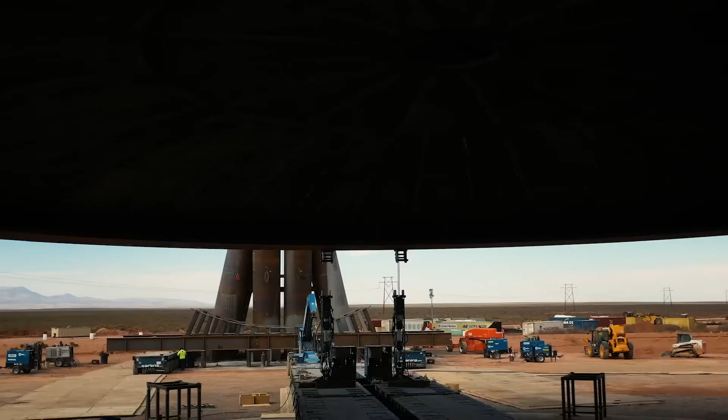In the middle of a global pandemic, a ragtag group of welders, heavy machine operators, and builders were brought together. They were given plans for a mysterious structure. With little information on what exactly they were building, their only clue was scrawled across the top of their plans: SpinLaunch, a space catapult. In this exclusive, behind-the-scenes documentary, I talked to the people behind this new innovative company.

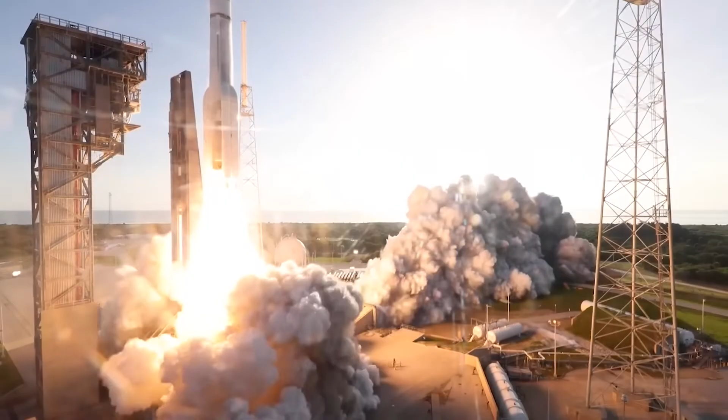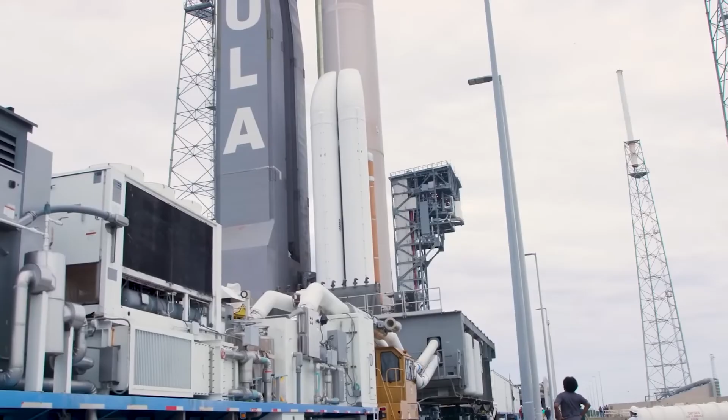SpinLaunch is attempting to subvert a problem that plagues the space industry: the rocket equation. The rocket equation has been the tyrant engineers have feuded with from the dawn of the space age, a simple equation that describes how much fuel a rocket needs to carry a payload to its destination. The tyranny of this equation is that the fuel needed to deliver that payload is a payload itself, a compounding problem that makes rockets more fuel than rocket.

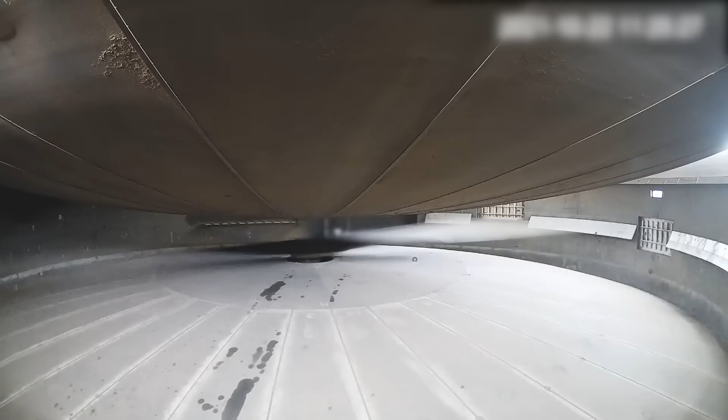Typical rockets are more than 90% fuel. SpinLaunch is trying to change that paradigm by imparting as much velocity as possible to the payload on the ground, eliminating as much fuel as possible from the rocket's weight, while greatly reducing the size and complexity of the non-reusable components. Their plan: to spin a small rocket in a centrifugal mass accelerator under a vacuum up to an astonishing speed before releasing it, punching through the thickest layers of our atmosphere at hypersonic speeds, gaining 72 kilometers of altitude off nothing but pure kinetic energy, before splitting its fairings and unveiling a substantially miniaturized two-stage rocket to continue its journey into orbit. You may question the numbers here, but this isn't the first time this has been done.

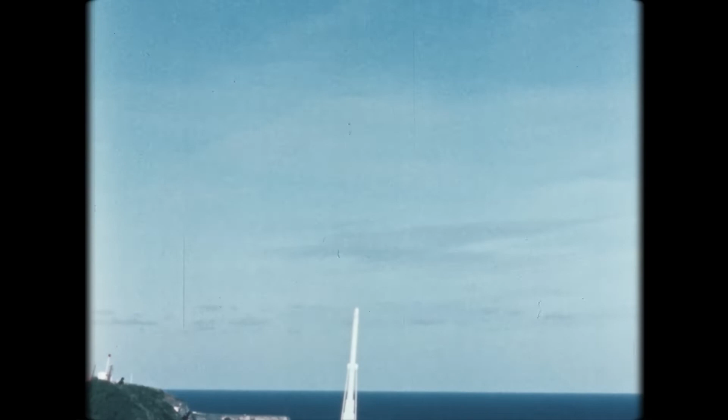Project HARP, standing for High Altitude Research Project, managed to get a projectile to 180 kilometers of altitude with a high-powered gun. They achieved a muzzle velocity nearly identical to SpinLaunch's planned launch velocity. However, scaling a kinetic energy launch system up to launch a 10-ton projectile needs SpinLaunch's technology.

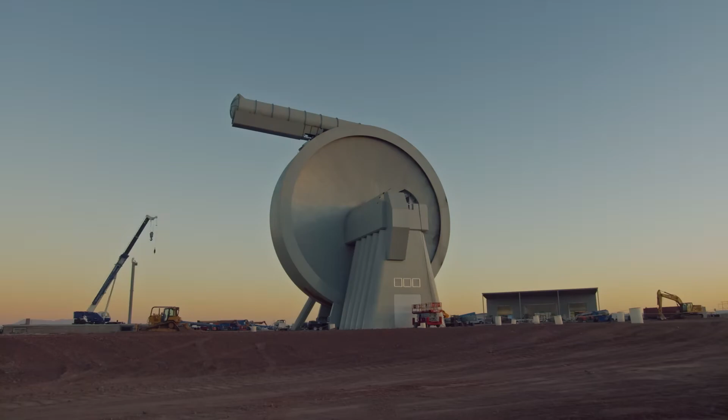Of course, all of this is easier said than done. The challenge facing SpinLaunch's engineers is immense. This endeavor demands several new key enabling technologies.

So in terms of key enabling technologies, carbon fiber certainly takes center stage. That's David Wrenn, SpinLaunch's VP of Technology. I spoke with him on the SpinLaunch factory floor about the carbon fiber reinforced plastic that they are using for their tether. In terms of its strength to weight ratio, it's essentially unmatched by any other material on Earth. And the amazing thing is that it's actually available in industrial quantities now, and the engineering tools and simulation methods exist to really quickly iterate and understand what a composite structure will do. And then we have structures and test rigs like this to validate in the real world that the components actually fail at the expected loads.

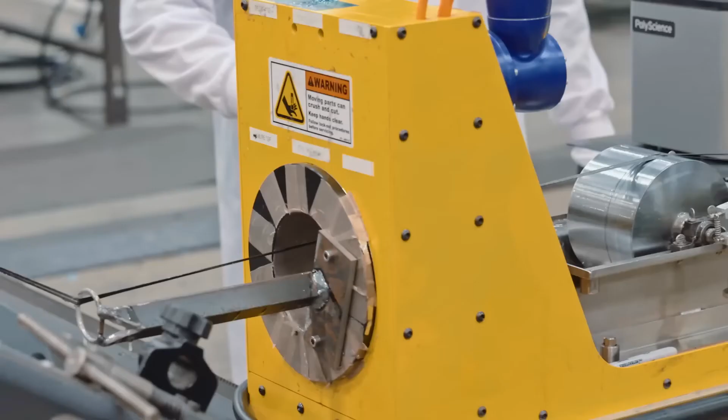So just to give you a sense of the strength of carbon fiber, this is a pultrusion. So this is made by taking carbon fiber tow, essentially spools of carbon fiber, and pulling it through a heated die with a resin bath. Basically, the resin gets impregnated into the carbon fiber tow as it gets pulled through the heated die. And you get these really nice, highly unidirectional structures that can be used for SpinLaunch, right?

And so as small as this cross section is, right, I think this is about 1/8 of an inch thick and only a few inches wide. This can do just under 250,000 pounds of total load capacity, which is really, really impressive. I'm trying to convert it to metric in my head. It's like, oh yeah, no, that's a lot. Yeah, I think it's like 1,000,000 newtons or something like that.

Yeah. So, and then if you look at, this is where it gets interesting is can you build really thick cross sections of carbon fiber? You can see there's really great... Is this pultruded as well? So this is not pultruded. This is laid up and then it's cured in an autoclave. Okay. So this is essentially a subsection of the laminate that you would see at the root of the tether on the suborbital system. So this is not unidirectional or pultruded.

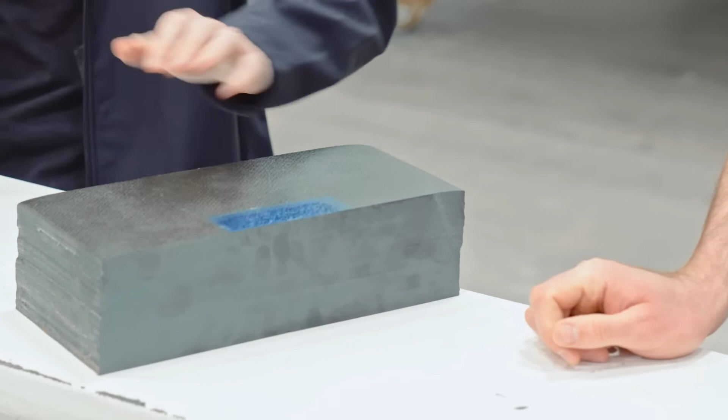But if you were to take this same cross section here, and basically make this a pultruded fiber, if you just stack up multiple pultruded sections, you would get about 9 million pounds of total load capacity through this cross section. So it's impressively strong for what it is. I mean, it's heavier than you'd expect. Yeah, holding a carbon fiber brick. I don't think I've ever seen an application where that much carbon fiber has been laid up. It's rare to see carbon fiber this thick. Yeah, it really is rare.

The final fully scaled tether for SpinLaunch's orbital system is likely going to be the single strongest tensile structure on Earth. Let's do the math on that. SpinLaunch aims to yeet its aeroshell containing the miniaturized rocket system at about Mach 6, that's roughly 2 kilometers per second. With a radius of 45 meters, the tether will need to spin 450 times per minute to attain that velocity.

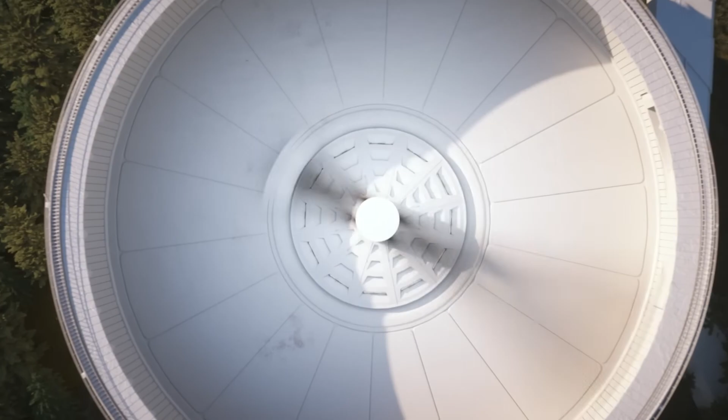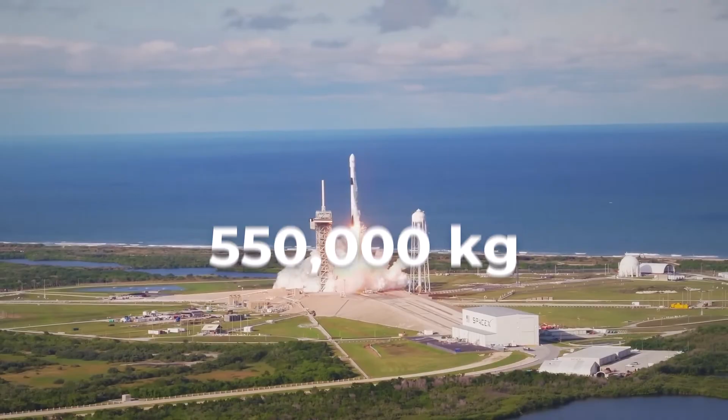At that rate, the G-loading on the tether will be 10,000 Gs, meaning this aeroshell is going to exert a force 10,000 times greater than its weight due to gravity. The aeroshell with the payload and rocket is going to weigh approximately 10 metric tons. So that means the tether at the tip needs to support 100,000 metric tons, or 100 million kilograms. To put that in context, a fully loaded Falcon 9 weighs about 0.55 million kilograms. So this tether needs to support the equivalent weight of 182 Falcon 9s.

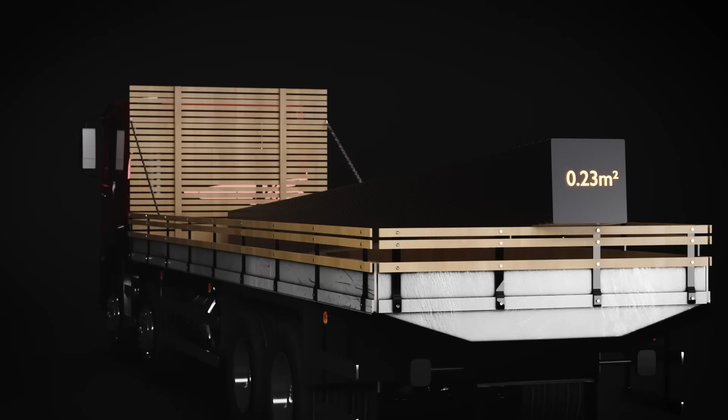This is going to require a hefty piece of carbon composite with a cross-sectional area of at least 0.23 meters squared. That explains the brick of carbon fiber we saw. That brick could support 4.1 million kilograms. So the full-scale tether will need to be 24.4 times this size at its tip.

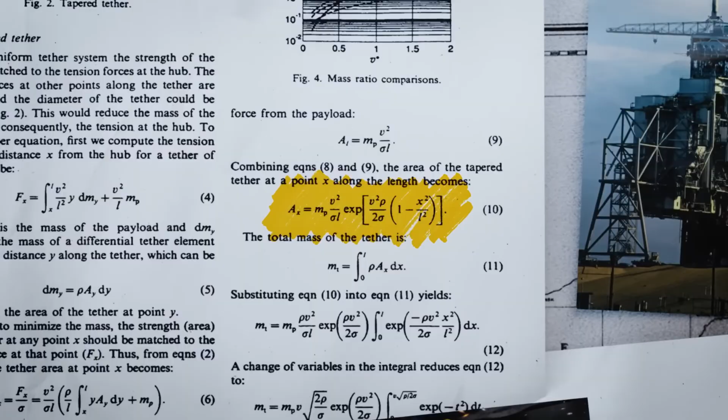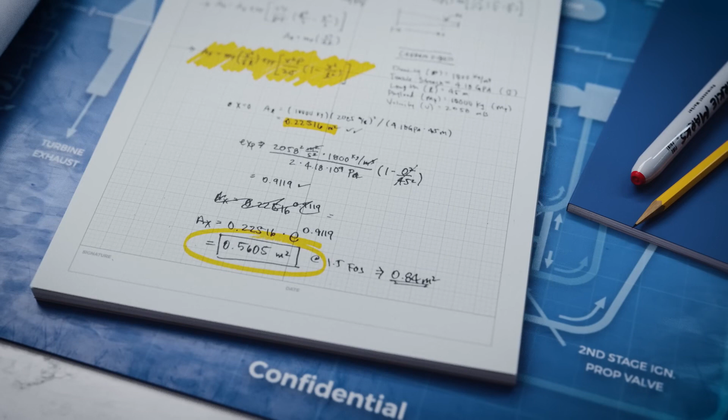But that's just the tip. This equation tells us why carbon fiber is so vital to this endeavor, because each section of the tether has to support the section above it. Its strength-to-weight ratio needs to be exceptional. If we calculate the tether area near the hub for the same carbon composite, the tether only needs to increase in area by 2.5 times, at about 0.56 meters squared. We would, of course, need to add a safety factor of at least 1.5, increasing these dimensions by 50%.

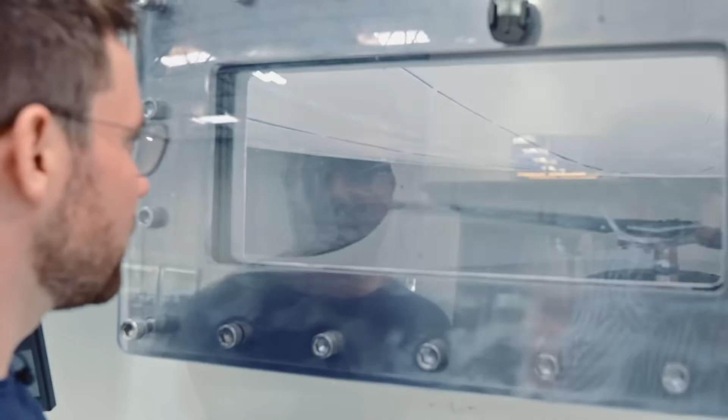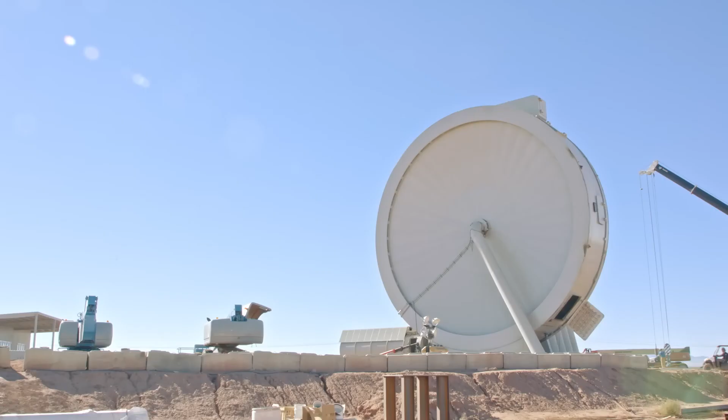That design is perfectly feasible and is reflected in SpinLaunch's renders. We even have the manufacturing skills necessary to build even larger composite structures thanks to the wind industry. So this is all well and good, but spinning a carbon fiber composite up to Mach 6 isn't possible in air. The aerodynamic heating would destroy it. So to solve this issue, SpinLaunch created a massive vacuum chamber around its tether.

There's a bunch of things at the beginning of SpinLaunch that were non-starters for a lot of people, like even just building the large diameter vacuum chamber. People were telling us the one behind me here would cost tens of millions of dollars to build, and we ended up doing it. We had this really scrappy, lean mindset, and we ended up doing it for less than a couple million dollars with about 10 people, which is unheard of. There are some large industrial vacuum chambers out there, but quite a few of the really large chambers in the world are for aerospace applications, achieving extremely high levels of not only vacuum but cleanliness. So the cost is proportional to that, and it's kind of exponential.

They're achieving vacuums on the order of 10 to the negative 8 torr. Typically we're operating at about 1 million times worse than that. SpinLaunch is breaking new ground with this kind of vacuum chamber.

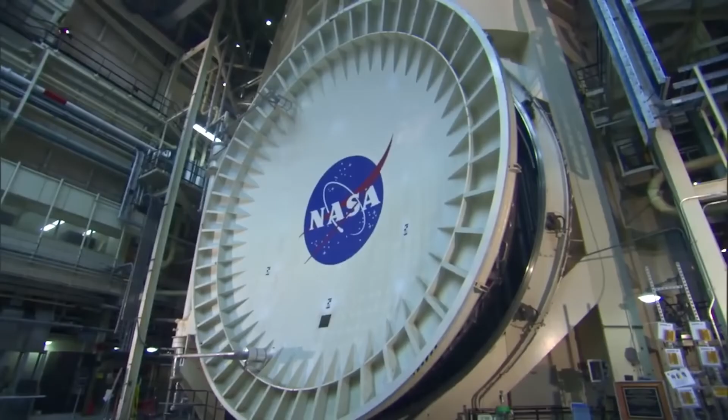Typical large volume vacuum chambers, like the world's largest one at the Space Power Facility in Sandusky, Ohio, are designed to simulate the vacuum of space. Those require an extremely low pressure vacuum with tight tolerances and control of contamination. They even need specialized tools like lamps to simulate the radiation and heat from the sun, and cryogenic cooling to simulate the cold of space. The people who built these facilities are the industrial experts SpinLaunch had to draw from, and most thought they would never be able to build a vacuum chamber this large on their budget.

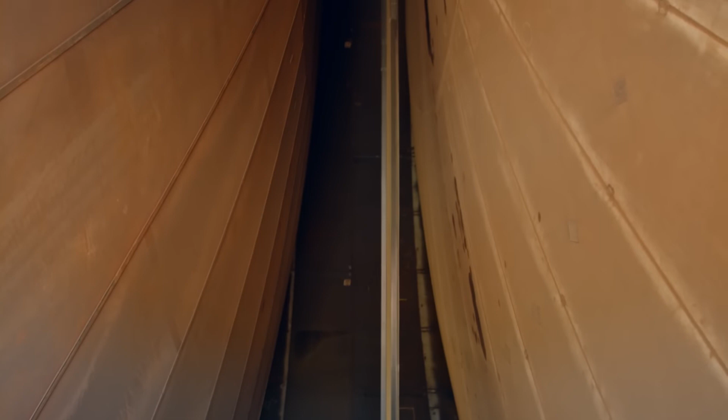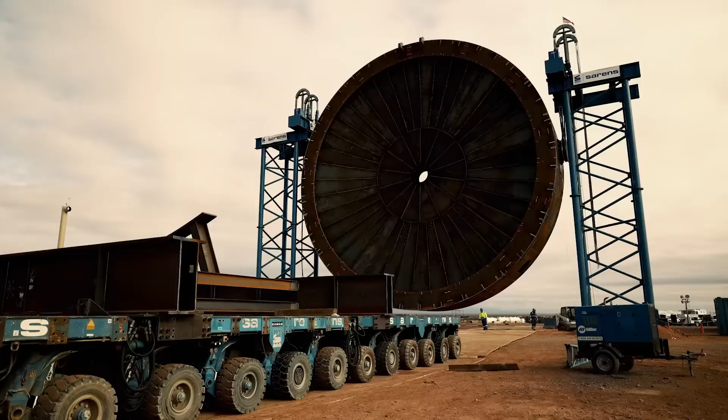But SpinLaunch does have some things on their side. They didn't need that extreme of a vacuum, as their goal is not to simulate the vacuum of space. Their goal is to minimize drag and the power required to overcome it, minimize the aerodynamic heating that would destroy the tether, and eliminate pesky aerodynamic effects like flutter. That means SpinLaunch could use cheaper materials like mild steel, where ultra-high vacuum chambers need more expensive specialized processed materials to avoid outgassing, where gases within the metal, in the form of oxides or simply dissolved within the metal, are released into the vacuum.

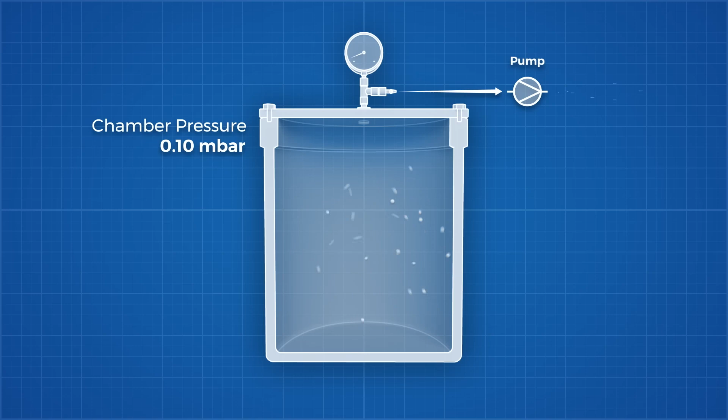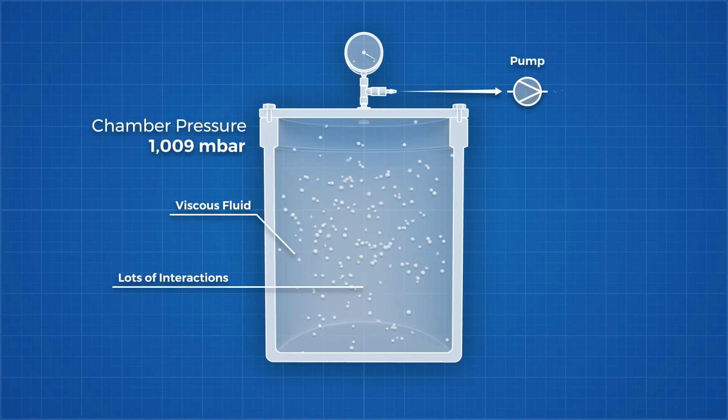It also makes the process of drawing a vacuum much easier. Drawing a vacuum isn't as simple as just turning on a pump and leaving it on long enough. The more air you draw out, the harder it becomes, as you are working against not only a continually growing pressure gradient, but statistical probability. The first stage of drawing a vacuum is to remove the bulk gas. At this stage, the gas is a viscous fluid, and the molecules within the chamber interact with each other often.

Here, we can use traditional fluid flow pumps, like a positive displacement pump, that mechanically move molecules out of the chamber, and higher pressure air at the back of the chamber forces more air to fill the space created, allowing more air to be pumped out.

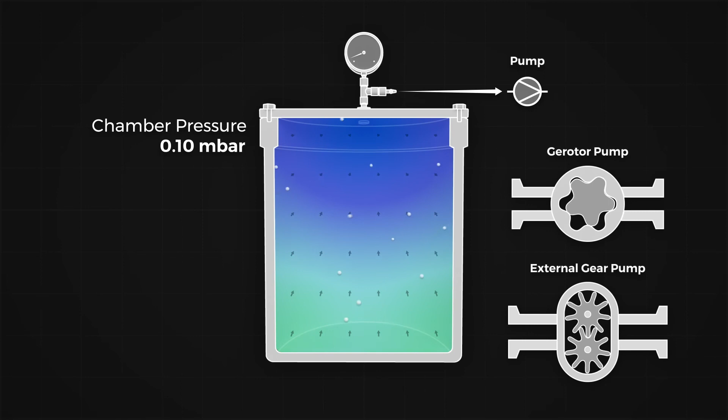But as gas is removed from the chamber, the distance between the molecules increases. This is called the mean free path, the distance a molecule can travel without colliding with another molecule. Now, pressure is really just molecules colliding, and as collisions become more infrequent, the pressure gradients needed to achieve equilibrium begin to vanish, meaning it takes longer and longer for equilibrium to be established, and the rate the pump can remove molecules lowers, as there are simply fewer and fewer molecules near the pump to remove.

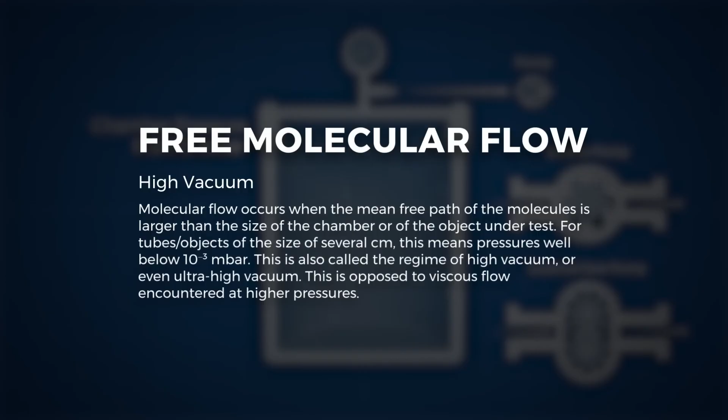At some point, viscous flow stops entirely, and we enter a flow regime called molecular flow, where the distance between collisions is actually larger than the internal dimensions of the vacuum chamber, meaning the molecules are statistically more likely to just bounce around inside the chamber with nothing forcing them towards the exit.

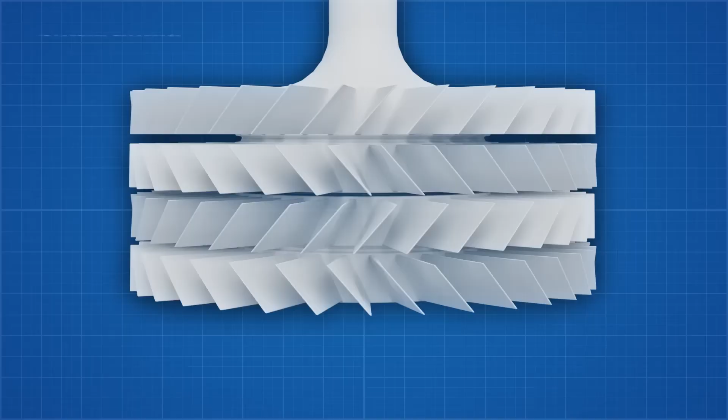At this stage, it is impossible to actively pump the molecules out. The molecular pumps needed for this flow regime instead act like some kind of Venus flytrap, waiting for a molecule to enter it, and then its job is to prevent the molecule from returning to the original chamber.

Turbomolecular pumps are basically multiple levels of turbines that knock molecules in one direction and prevent them from traveling backwards. These pumps require insane rotation speeds, anywhere from 36,000 RPM to 72,000 RPM, and need incredibly tight tolerances too. They are trying to pump individual molecules after all. So it goes without saying, these kinds of pumps are expensive.

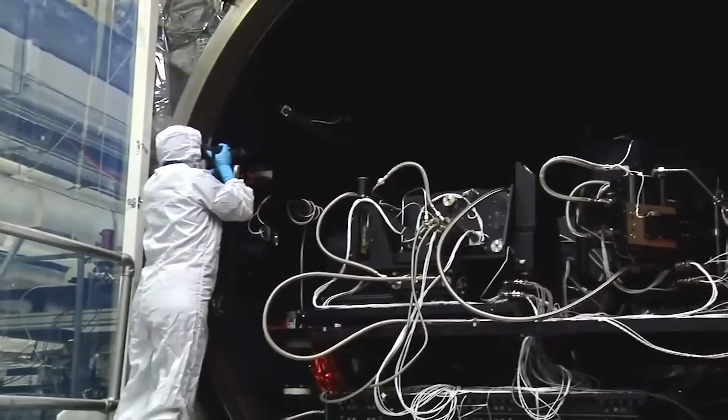All the while, outgassing and other leaks are actively working against a game of pure chance. Creating a high vacuum requires extreme precision in manufacturing and design.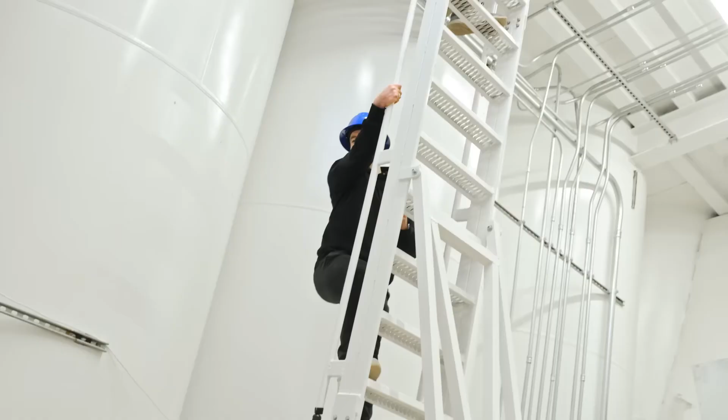SpinLaunch didn't need any of this. Mark Sipperly, the director of engineering at SpinLaunch, walked me through the vacuum pump station at the New Mexico site.

Here in the vacuum plant, the most familiar thing would be the tube that came out of the chamber and then runs underground is this manifold. So this is the very end of it. So off of this vacuum manifold, we then have a series of 3 different types of pumps.

Up on top, we first have roughing pumps, which pull the atmosphere from 1 atmosphere down to about 30 millibar. Those are dry screw pumps. They're essentially like overlapping lobes. It's one form of like a supercharger.

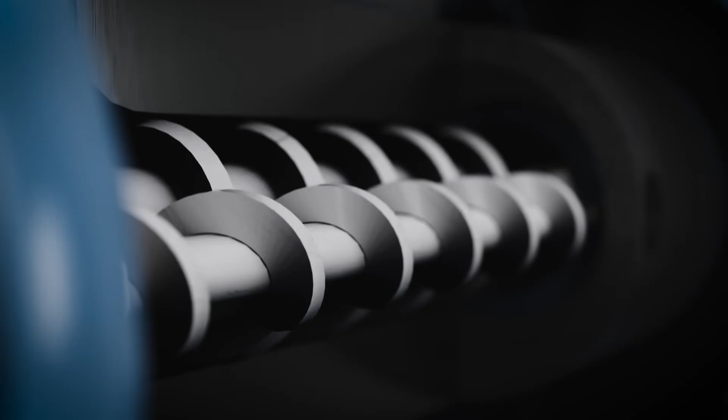Then the next stage is we have this roots pump, which is like another shape of a supercharger. It's the rotating twin screw pumps. All right, so that kicks on at about 30 millibar. It's mostly only effective at 30 millibar and below.

But you'll notice that each pump exhausts into a pump that's a slightly higher pressure. So this roots pump only works at 30 millibar and below, but it can't exhaust that all the way out to 1 atmosphere, so then it's backed by another pistons pump.

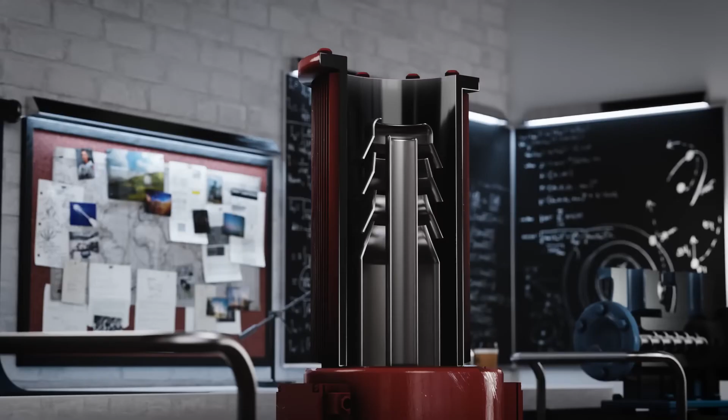And then once we get down below 1 millibar, then we're gonna turn on these vapor diffusion pumps, which are only really effective down at the very low pressure, and those work like oil jets. So you vaporize oil, you shoot it down a series of channels, and it grabs onto the air molecules.

Runs them down a series of tubes, and then you have these cooling loops that will then condense out the oil, and then the air progressively makes its way through like a long path, and then eventually gets to a roots pump, which can grab onto it, and then that goes to a piston pump, and then all the way out.

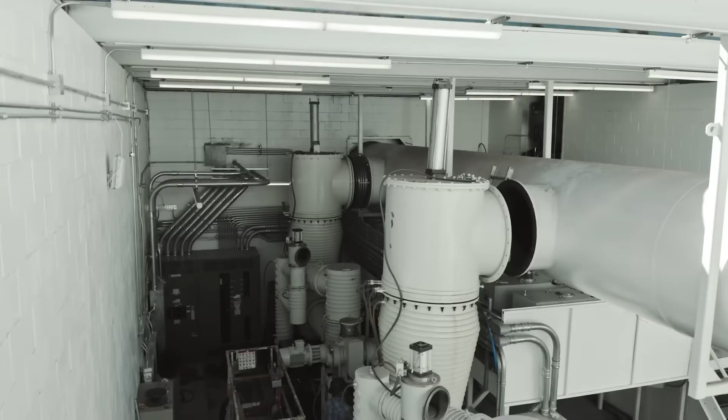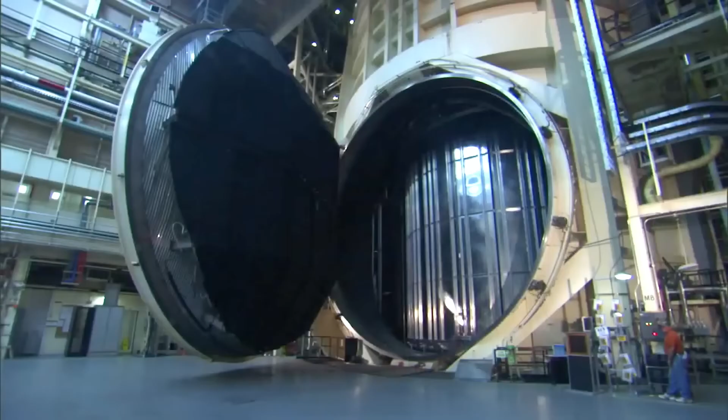So we talked before, vacuum may not be the best description, because most people think of vacuum as like a hard vacuum, in torr is what most people are used to, like e to the -7 torr, so like 6 zeros and then the number. That's like true vacuum, that's hard vacuum, that's where you test like electrical propulsion systems and high-end space features.

That is nowhere near the atmosphere that we need, and that vacuum is also really expensive to get to, and you have to follow a lot of stringent rules, like you can't use steels, you have to use aluminums or thin coatings. Even putting your fingerprint in a vacuum that low would take like weeks to boil off.

We only require the equivalent of like e to the -3 torr, so 0.01 millibar or 0.1 millibar. Today we're gonna be running at like 1 millibar because we only pull the vacuum that we need because vacuum is expensive. It's closer to describe it as like a high altitude chamber than a vacuum chamber specifically.

This is another one of those technical issues that the internet made a big deal out of without fully understanding what SpinLaunch actually needed out of the vacuum chamber.

One of the other primary concerns expressed on the internet was the tricky and unique problem of a vehicle traveling at hypersonic speeds from a vacuum into a thick sea-level atmosphere.

To begin with, we need to prevent air from rushing into the vacuum chamber once the vehicle is released. SpinLaunch is aiming to be a high-frequency launch system, capable of launching multiple satellites per day, holding the vacuum between launches to decrease energy and time costs. However, the primary concern is the disastrous effects that air would have as it meets the tether spinning at hypersonic speeds.

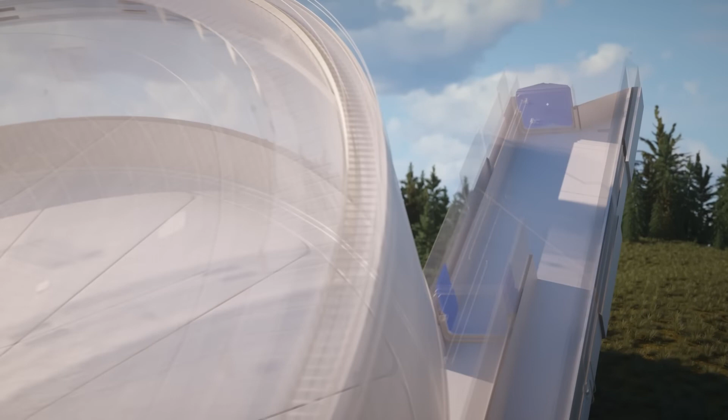This would be an incredibly expensive single-shot system if this was allowed to happen. To solve this problem, SpinLaunch needed a way of sealing the chamber extremely quickly after launch. Inside this long tube attached to the vacuum chamber is a double-door airlock with doors on either end of the tube. This tube is also under vacuum during spin-up.

As the vehicle is released, using a release mechanism that SpinLaunch kept hidden from our cameras throughout the shoot, it passes into the exit tunnel, where the first door rapidly closes behind it. As this first door is closing, the second door will begin to open. The atmosphere will begin rushing into the tube and give the aeroshell its first taste of the hypersonic flight regime it will be flying in.

The first and second door need to close quickly enough to prevent air from entering the vacuum chamber. This is not an easy problem. Millisecond delays that may seem trivial in most cases start to mount up when the vehicle travels this quickly. The time it takes for an electrical signal to propagate, the time it takes to overcome the inertia of the door, the time it takes for a proper seal to form. All these problems become matters of survival at these speeds.

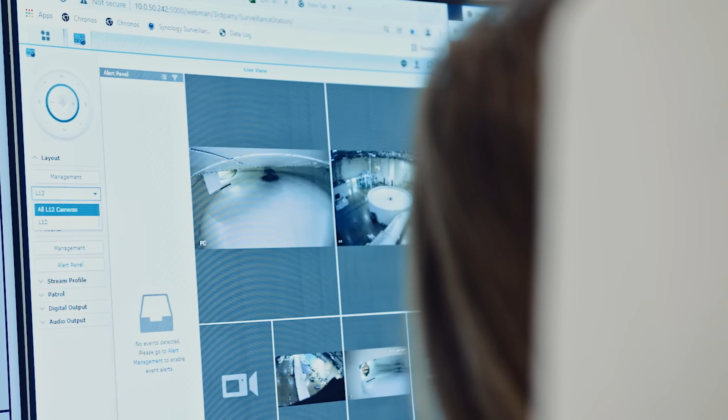Once again, SpinLaunch are keeping their cards close to their chests on this one. But they did give me a demonstration of the door closing in their factory and engineering hub in Long Beach, California. It's moving really fast.

Without specifying, is he gonna do a countdown? Yep, so whenever you're ready, just let me know. So basically what's gonna happen is this is going to be filled with, for lack of a better word, like a black door, which you'll see you can pass through with a vehicle, and then in an instant it's going to be closed. It's like faster than the blink of an eye. You'll see a little bit of settling after it closes, but it's basically 95% closed within 30 milliseconds. Oh wow, okay.

Closing airlock in 5, 4, 3, 2, 1.

It's pretty fast. Yeah, that's not what I was expecting. Yeah, it's fast. So it actually closes, it's actually hinged, there's a pivot involved. Yeah, I wasn't sure if it was going to be a sliding thing, but the hinged one makes sense as well. That wasn't what I was expecting. So it's 100% reusable, you can set that back up and do it again and again and again. That's a key aspect, you don't have any major consumables in the process. That's cool, yeah, it's fast.

Visceral. All right, I don't know, it's a door closing, I don't know what to ask. It's really important not to let air back in. Yeah, that's why I have it.

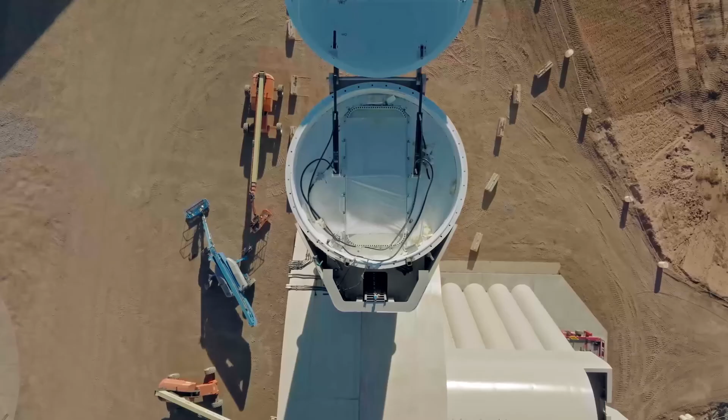We see viability there. In SpinLaunch's public videos, the secondary airlock has simply been sheets of mylar. This is one of the few problems that becomes easier as the launcher scales. As the exit tunnel grows in length, it will take air longer to reach the door at the base of the exit tunnel.

SpinLaunch have only just begun these 1/3 scale tests, with their fastest launch to date at 1.6 Mach, slowly ramping up the speed of launch as they test their systems. This prototype launcher features some other simplifications compared to their final planned configuration.

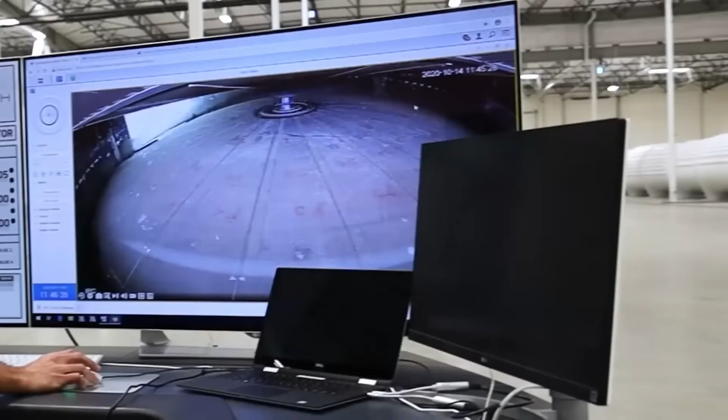One of the most obvious problems to tackle is the issue of vibration. When a spinning object's weight is not evenly distributed, it will vibrate. This is how rumble feedback works in gaming controllers, a simple electric motor with an uneven weight attached. However, with a structure as large as SpinLaunch's tether spinning several times per second, any imbalance could shake the entire structure to the ground.

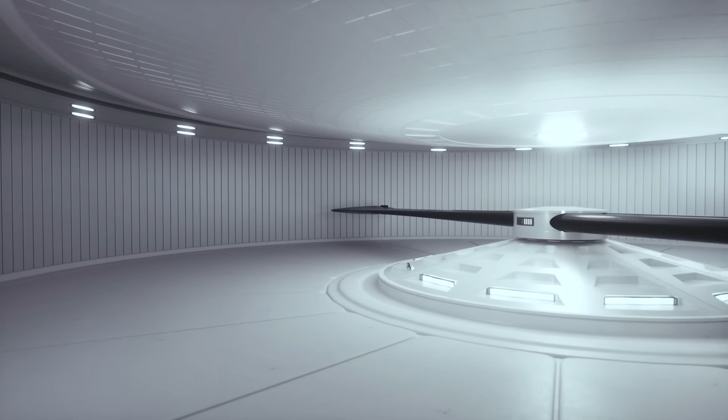This is a major problem, because by design, the tether releases a 10-ton weight right at its maximum velocity. SpinLaunch needs a way to balance the tether after launch. There is a very simple solution to this problem though: release a balanced weight from the other side of the arm at the same time.

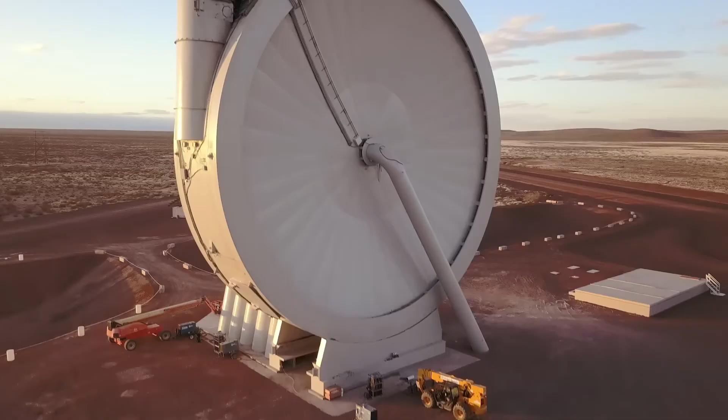Right now, they are simply releasing a counterweight that slams into an armored section of the vacuum chamber. We saw one of these counterweights being manufactured out of fiberglass in the Long Beach factory. However, over the long term, having to clean up the mess this creates after each and every launch is far from ideal. The ideal solution would be to release a counterweight in the form of another launch vehicle after a single half rotation of the tether.

The oil-filled journal bearing the massive axle sits upon should be able to absorb the force of this imbalance over a period of time this short.

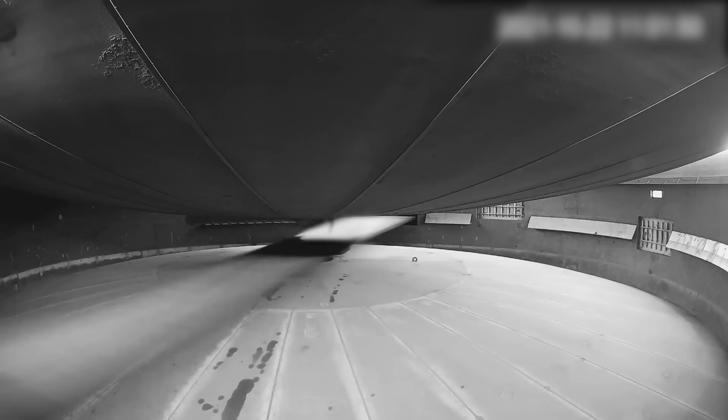The next issue we need to concern ourselves with is the aeroshell punching into the atmosphere at Mach 6. This, again, is a fairly unique problem. Typically, weight is a restraining factor in aerospace, but for SpinLaunch, the energy required to spin the aeroshell up to speed is actually rather trivial.

It's on the order, I like to use the analogy of a Tesla. The Tesla Model S Plaid is about 0.7 megawatts. So on the low end, it's about 100 Teslas, but it really comes down to specifics. Is that for the full scale? Yeah, for the full scale, yeah.

For the orbital system, you're talking about on the very low end, probably about 65 to 70 megawatts. And again, that really depends on where you end up with the final orbital tether, whether or not what safety factor you operate with, what tether strength you end up with, your effective tether cross-sectional strength. That all feeds back into itself, and then you have to kind of scale it accordingly. I would say, really conservatively, if you wanted to spin up really fast, then you're talking about a higher power demand. So whether you want to spin up in an hour or 2 hours, proportionally makes a difference of how much power you need.

But on the high end, you're talking about maybe 150 megawatts of power, which in layman's terms sounds significant, but there are motor catalogs where you can purchase a motor that has that capacity. So this is industrial scale hardware, and certainly mostly off the shelf.

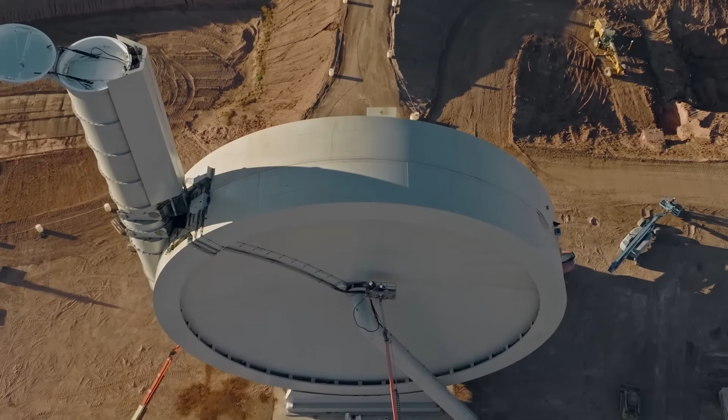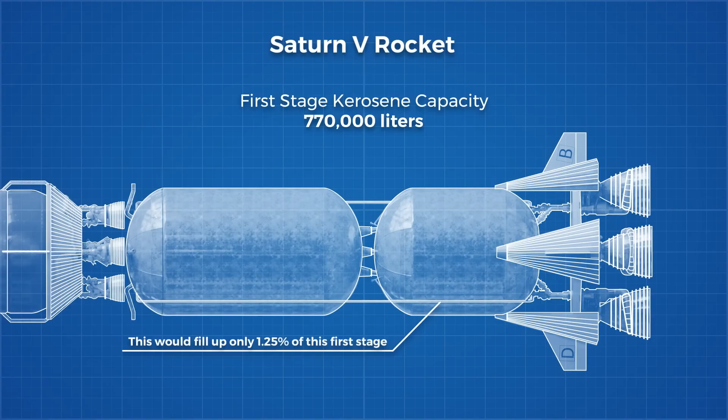SpinLaunch claims their total energy demand per spin-up is about 100 megawatt hours. The cost per kilowatt hour for industrial facilities is about 6 cents, so that's a cost of $6,000 in electricity costs. That's insanely cheap. To put that into perspective, 100 megawatt hours is equivalent to about 9,600 litres of kerosene, about 8 tons of fuel. For reference, the Electron rocket from New Zealand's small satellite launching company Rocket Lab, capable of launching a similar sized satellite, weighs a total of 12.5 tons, the vast majority of that weight being its own fuel and oxidizer.

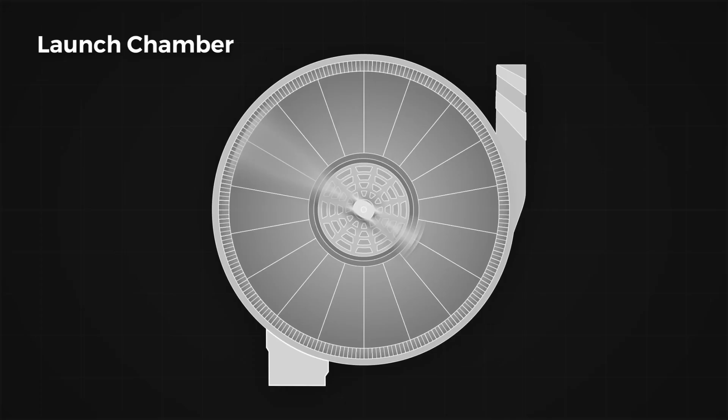SpinLaunch claims their rockets will need to carry about 30% of the fuel and oxidizer compared to their competitors. They are essentially replacing the first stage of a traditional rocket with an easily reusable kinetic launch system. SpinLaunch will also be able to recapture a good deal of the electricity stored as kinetic energy in the tether using regenerative braking, even further reducing their electricity bill.

Because of all this, the limiting factor for SpinLaunch in terms of weight is actually the weight the tether can support, and as a result, it actually makes sense to maximize the density of the aeroshell, because it affects its ballistic coefficient, a variable that will drastically improve its ability to punch through the atmosphere. Ballistic coefficient is essentially an object's ability to resist air resistance.

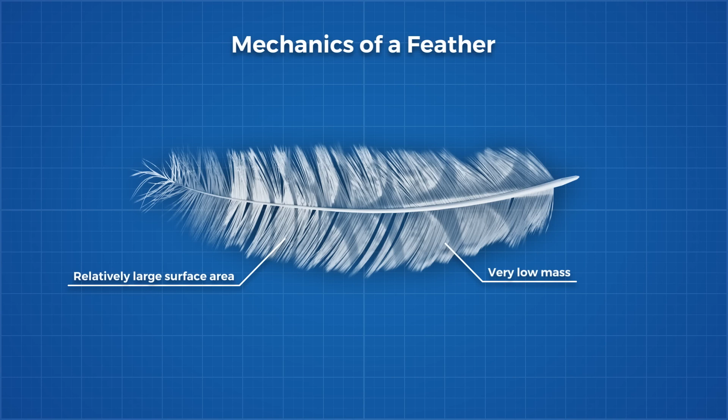Think about how hard it is to throw a feather. No matter how hard you throw it, it's not going to go very far. It's got a large surface area for air resistance to act upon relative to its weight. That's a low ballistic coefficient. Ballistic coefficient is found by dividing the mass of the projectile by the drag coefficient multiplied by the cross-sectional area. So SpinLaunch effectively wants to maximize the mass relative to the cross-sectional area.

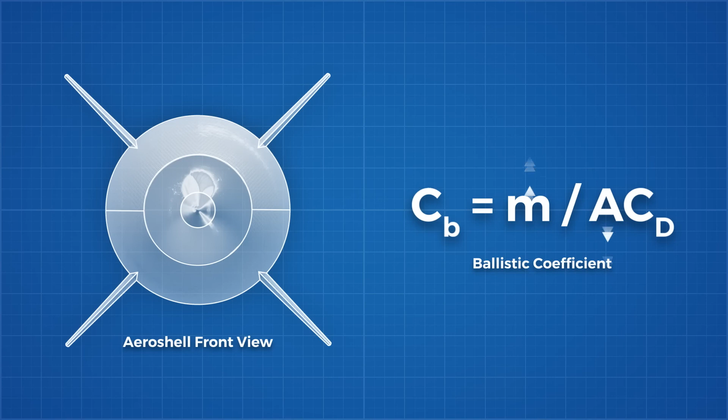This is obviously not typical for aerospace vehicles. If you look at re-entry capsules, whether it's for something like the Stardust return capsule where it's really high velocity, or re-entry from orbit for a manned capsule or something like the space shuttle, they're typically using thermal protection systems that are extremely low density, on the order of less than 300 kilograms per cubic meter. It's just basically foam. Typically that means you're making significant compromises, the material often is brittle or prone to fracture, or really expensive, or gets worn away, and then you have to replace the tiles, kind of in the infamous case of the space shuttle.

So what we're dealing with is on the tip of the vehicle, you have materials like copper, which not only are a significantly higher density, you're talking about thousands of kilograms per cubic meter, but they also have really great thermal conductivity. So as you transition through the atmosphere, you have a high heat load, but then you're dumping that basically into heavy dense materials that have good thermal conductivity.

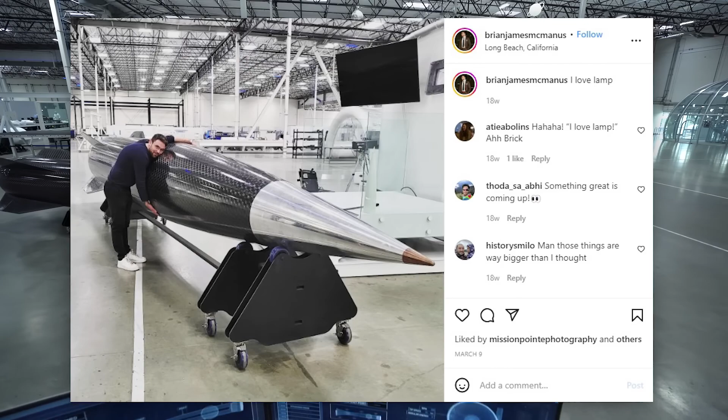This is one of those unintuitive consequences of this style of launch. When I first saw the full-scale aeroshell on the SpinLaunch factory floor, I first asked if I could ride it like a cowboy, but then immediately noticed the bimetallic nose cone. I knew from looking at it that it was made from copper and aluminium, and that struck me as extremely odd. Those metals would melt at the temperatures I associate with hypersonic speeds.

But because SpinLaunch launches at Mach 6, it actually transitions through the lower atmosphere rather quickly, and as a result, the heat generated can simply be absorbed by these large heat sinks. Aluminium and copper's high thermal conductivity means the heat is distributed through the body of the aeroshell before it has a chance to damage the vehicle.

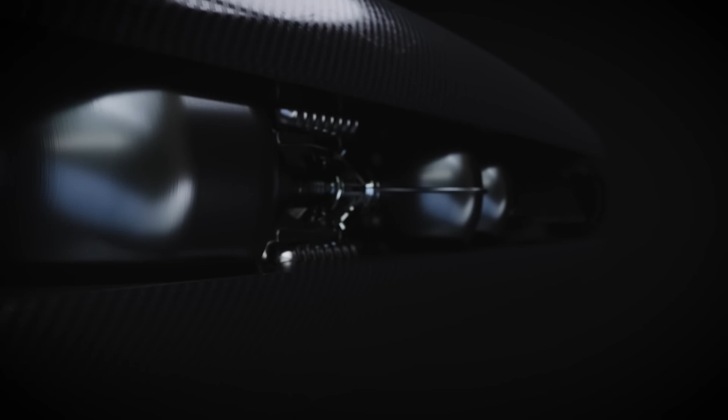The hefty carbon fiber shell is also incredibly strong. SpinLaunch has already pulled their smaller scale aeroshells out of the ground, buried several feet deep from the force of impact, and reused them with minimal refurbishment. With a parachute, these aeroshells will be fully reusable with minimal maintenance, especially as they serve no function other than to protect the inner rocket stages. This isn't an intricate mechanical machine.

Launching from the ground at these speeds comes with advantages too. If we plot drag coefficient versus Mach number for a bullet-like projectile, something rather unintuitive occurs. The drag coefficient rises as you would expect until we hit Mach 1. At this point, it starts to fall as Mach numbers increase.

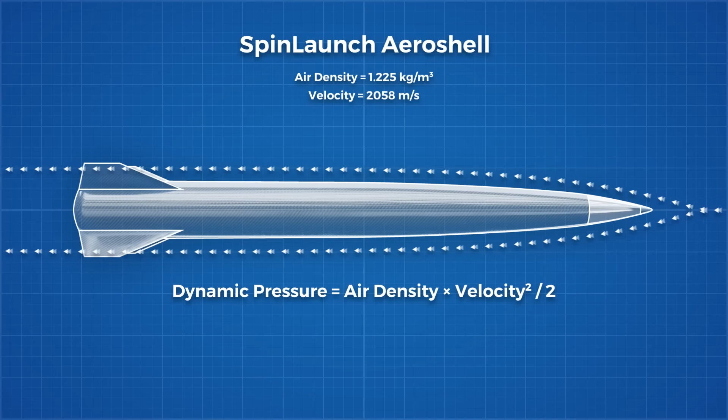Let's calculate the dynamic pressure this drag would create at launch and the deceleration it would cause. The dynamic pressure is found by multiplying air density by the velocity squared and dividing by 2. At sea level, at Mach 6, the dynamic pressure will be about 2.6 megapascals. The final aeroshell is 1 meter in diameter and has a drag coefficient of about 0.1, which means the force applied to the aeroshell at launch will be 205 kilonewtons.

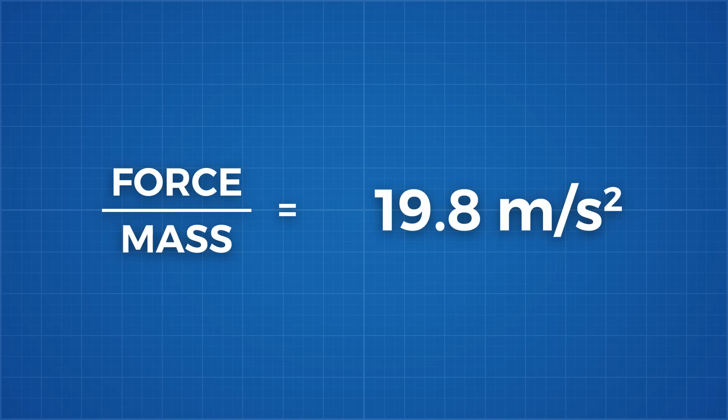This sounds like a lot, but here's where ballistic coefficient comes in. The drag force is being applied to a 10-ton body moving at Mach 6. That's a lot of inertia. Force equals mass by acceleration, acceleration equals force divided by mass. That means high mass equals less deceleration. In this case, deceleration due to drag will be about 19.8 meters per second squared at launch, but it will rapidly decrease as we move through thinner and thinner layers of the atmosphere and lose velocity.

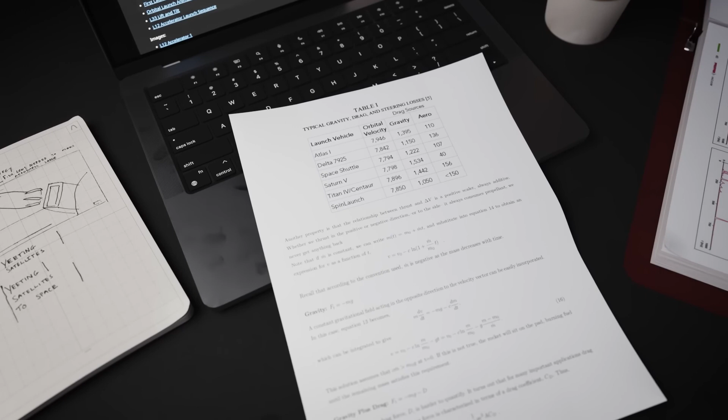With SpinLaunch's planned trajectory, we can plot the atmospheric density the aeroshell will encounter over time, halving in just 5 seconds and dropping to less than 10% of the original air density in 15 seconds. Meanwhile, gravity remains more or less constant at 9.8 meters per second squared, meaning gravity losses form the majority of energy losses in our transition to orbit.

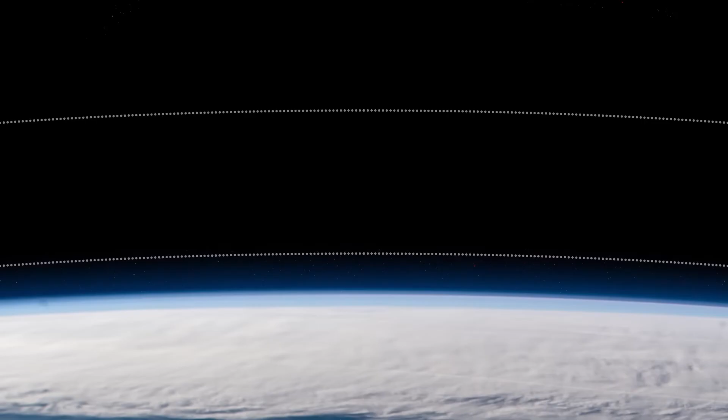In total, SpinLaunch will lose about 150 meters per second of velocity to drag and 1,000 meters per second to gravity. Satellites like Starlink orbit at 500 kilometers with a velocity of about 7,700 meters per second. So even if SpinLaunch maintained their 2,000 meter per second velocity from launch until the aeroshell broke apart, the two-stage rocket motor hidden within would still have its work cut out for it.

However, now free from the mass of the aeroshell, the substantially miniaturized rocket needs only a fraction of the fuel and oxidizer mass to rapidly accelerate the 200 kilogram satellite, the largest the system can launch, through the thin atmosphere at this altitude.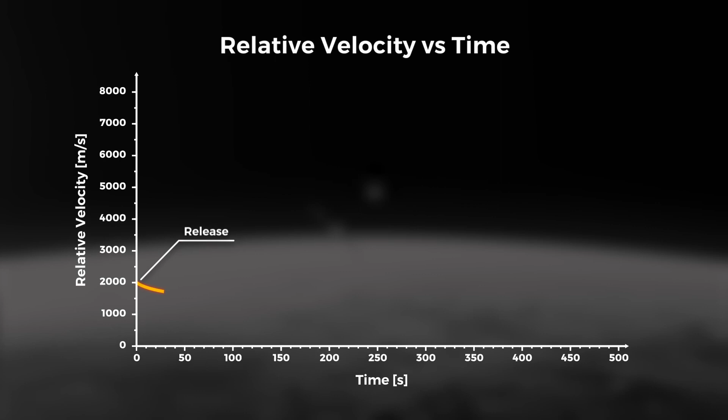We can graph the relative velocity of the spacecraft over time, starting at Mach 6 at launch and ending up at 1,500 meters per second when the aeroshell splits apart. The rocket motors then kick in to rapidly accelerate the satellite to its 7,700 meter per second orbital velocity.

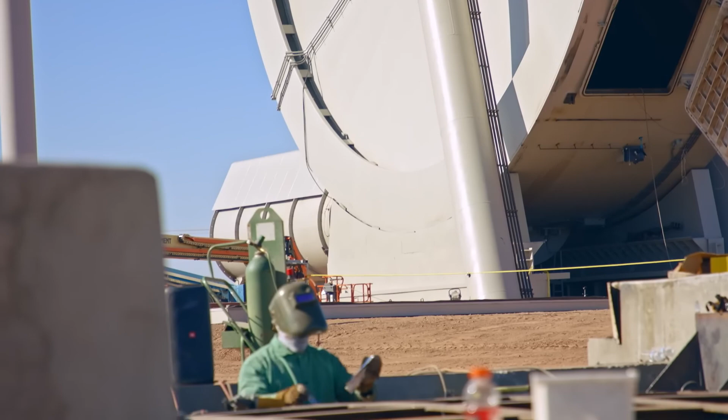The physics here absolutely check out, but whether the economics and cost of development will be viable is the big question. SpinLaunch has built a 1/3 scale prototype at a relatively low cost, but the hardest part of this technology is scale. They've reached 1.6 Mach thus far, have tested their satellite components at 10,000 G in their test facility in Long Beach, and are continually upping their test parameters, pushing further and further.

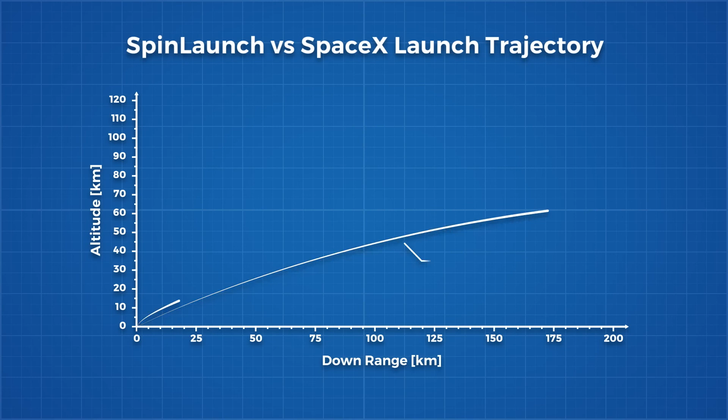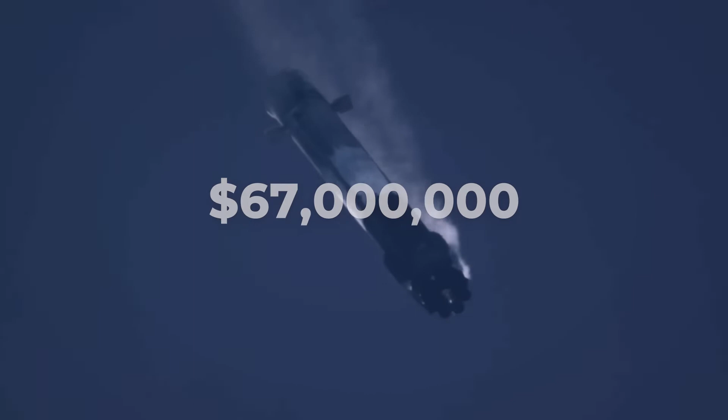This is a comparison of SpaceX and SpinLaunch's proposed launch trajectory, but it doesn't tell the full story of the real driving issue here: economics. A SpaceX launch to low Earth orbit costs about $67 million. The heaviest Falcon 9 payload to date has been 16,250 kilograms on a densely packed Starlink mission, equating to a launch price of about $4,100 per kilogram.

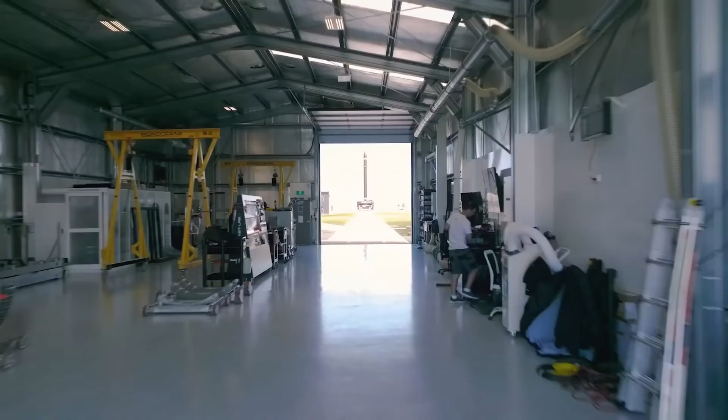However, small satellite launch companies like Rocket Lab, who offer greater control over orbit and launch schedules, charge about $15,000 to $25,000 per kilogram. Dollars per kilogram isn't a perfect metric, but it gives us some idea of the competition SpinLaunch is facing.

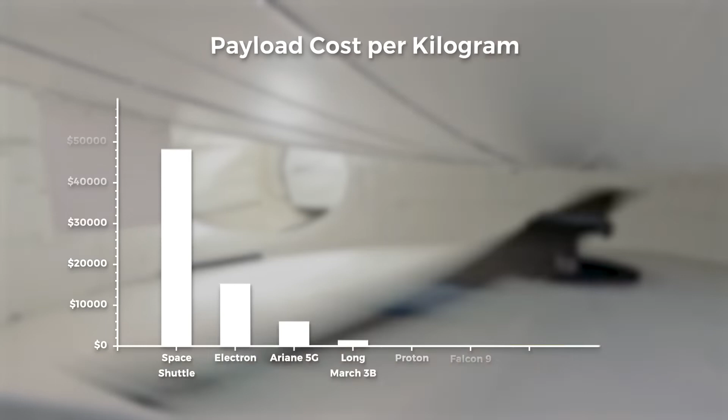SpinLaunch's main competitive advantage is in the decrease of expendable materials like fuel, while substantially miniaturizing rocket components. They also have huge potential to launch far more frequently than their competitors, helping economies of scale kick in. SpinLaunch claims to be targeting an ambitious per-launch price in the range of $500,000, placing them at $2,500 per kilogram.

In my time at SpinLaunch, talking to their engineers, it's clear they are excited and believe in this company. The basic napkin physics of SpinLaunch absolutely check out, and they are well on their way to solving the engineering challenges. But scaling up this monstrous engineering effort is going to require enormous amounts of investment, and SpinLaunch could not disclose the answer to many of my questions as they seek patents for their solutions.

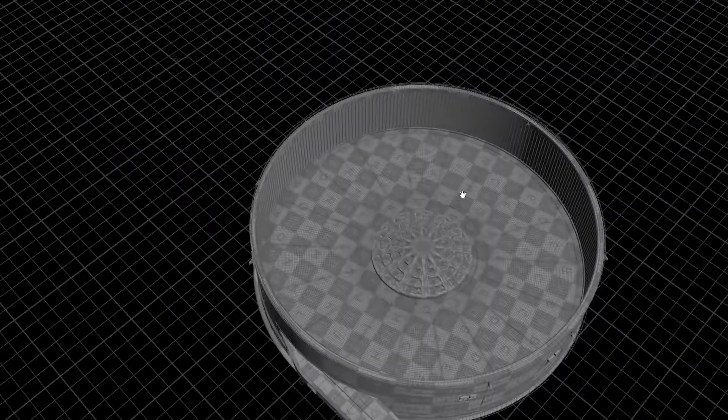I got little info on one of the most difficult parts of the launch system, the release mechanism for the aeroshell. Even the 3D models SpinLaunch provided for this video had the release mechanism removed, so we had to model our own along with the internal rocket structure.

The design of the satellites is another problem, due to the massive Gs the satellites have to survive. But G-hardening isn't as large an engineering challenge as the internet seems to think. The most difficult part, besides the structures, is also the reaction wheel.

The reaction wheel generates momentum and basically steers the bus. Typically it's a big mast that's cantilevered up at a certain angle, which is the one thing we don't like—you don't want a big mast sticking up on a cantilever. This is what I assumed was going to be a difficult thing, because it inherently has to be fairly high mass to control the satellites.

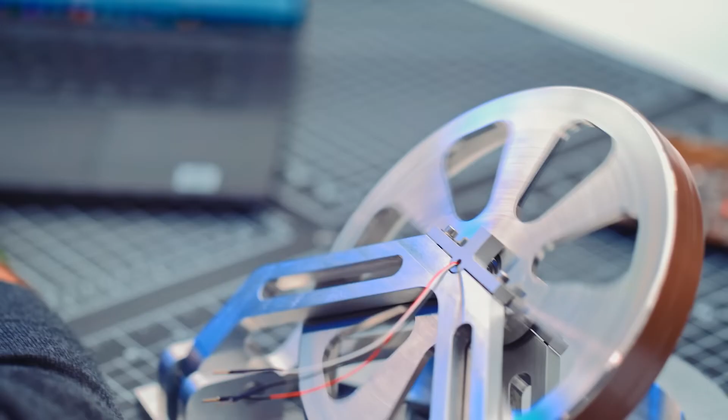Right. So instead of re-engineering the wheel itself and figuring out different ways to do that, we basically just took a clever approach to deploying the wheel. We support the wheel in a flat orientation, so when it's spinning, it's well supported and the bearings are unloaded, allowing it to spin freely. Then we deploy the wheel for when it actually needs to operate. It's a simple solution for what could have been a really difficult problem.

And does the axle of the actual wheel cause any issues when it's being G-loaded? I imagine it's like a fairly high weight to have on an axle. Yeah, so what we do is unload the bearings, and as part of the deployment mechanism, we reload the wheel into the bearings. Oh okay, so it's just taken off completely.

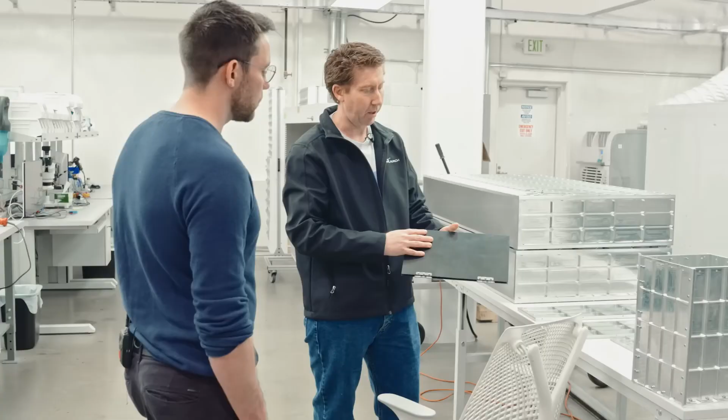Again, trying to make simple solutions for very difficult problems. Those are very simple answers. I figured that the inertial wheels would be difficult, and then you just think about it, it's like, oh yeah, that's actually a fairly easy thing to not deal with. You don't have to have it in the exact configuration when you launch. And the same with the solar panels, you can have them loaded. So the problems aren't necessarily hard to deal with, it's just you have to think differently. It's not that these are difficult problems, we just have to change the way we think about designing satellites a little bit. It's not a lot.

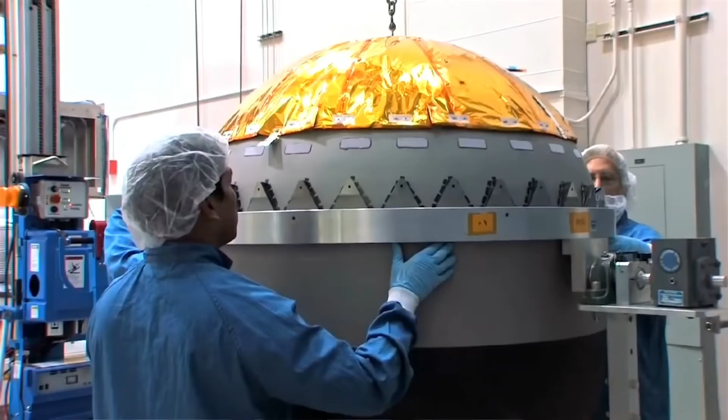The nice part is too that over the last 60 years, what people have been trying to do with satellites actually has helped us, because they want to reduce mass, they want to make things stronger. So every bit that they're forcing them to deal with shock and vibe already helps us, and it already inherently starts to make them more G-hardened. Most components, we don't have to do anything to them. Maybe a little epoxy here.

But one of the most surprising events that we had here amongst the entire team is we took a board that had a capacitor stuck up, maybe a quarter of an inch. And we all looked at it and were like, okay, that thing's just gonna fly off and hit the wall. And we spun it and we brought it back and it just went, and that was it. And we all like, all right, our intuition is completely changing, and it's because it's so little mass and it's being held on by two pieces of steel. The amount of force that was really imparting on those two pieces of steel was relatively small. So it just bent over, and we all kind of like, oh yeah, after you think about it, it does make sense. Okay, yeah, it does survive. So our intuition is starting to grow about, yeah, this little connector that's sticking up really isn't that big of a deal. And so that has been, in a positive way, very surprising, which is great.

Gs can only create force where there is mass, and it turns out the satellite industry has been finding ways to reduce mass for decades. A simple aluminium can is capable of withstanding 10,000 Gs with a basic redesign of its structure. Minimizing weight located on unsupported surfaces lowers the mass available to be multiplied by the Gs, and some simple corrugation can help the aluminium absorb some of the loading without buckling.

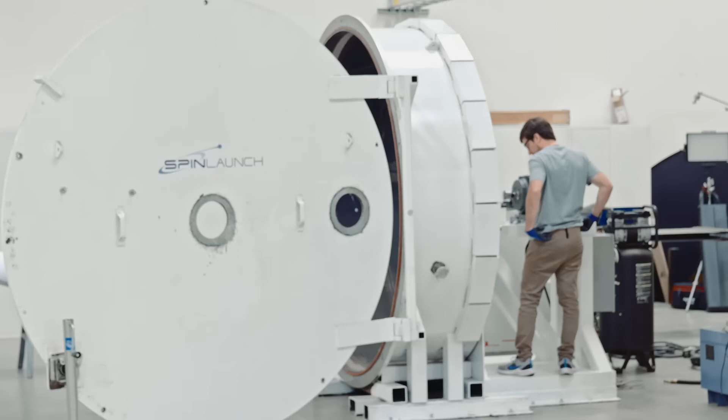We spun up an off-the-shelf star tracking camera using SpinLaunch's in-house centrifugal accelerator, which can already achieve 10,000 Gs, and the camera worked perfectly fine just moments later.

This is a really interesting engineering challenge that I think the internet is giving a hard time for some bizarre reason. Posing questions about basic physics calculations without actually doing the math and then saying it's impossible. Even missing the fact that kinetic energy launch systems have already reached beyond the Kármán line 6 decades ago.